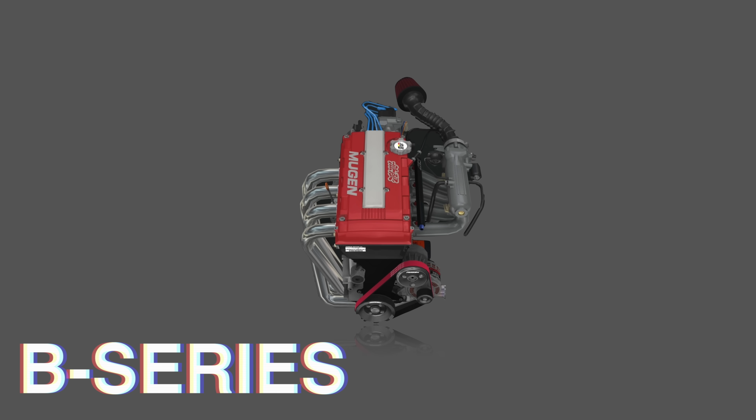The Honda K Series. One of the best bang for your buck inline 4-cylinder engines probably ever, and for good reason. The Honda K Series brings together two main features of earlier Honda engines: the high revving nature of the B Series, B16 and B18 engines that gave Honda such a legendary reputation, but also larger displacement and more torquey power bands, similar to the H Series engines like the H22 and H23.

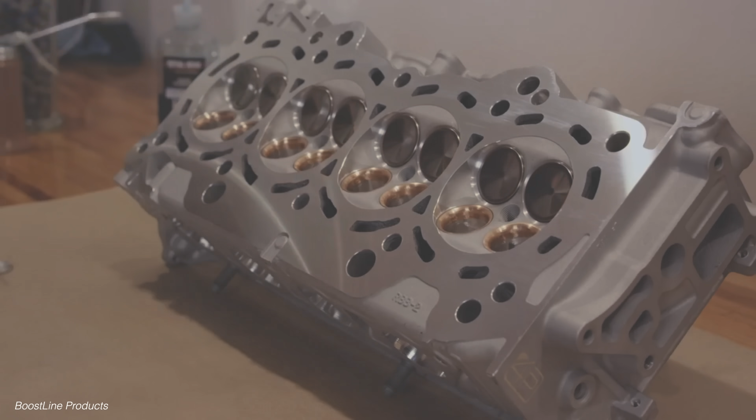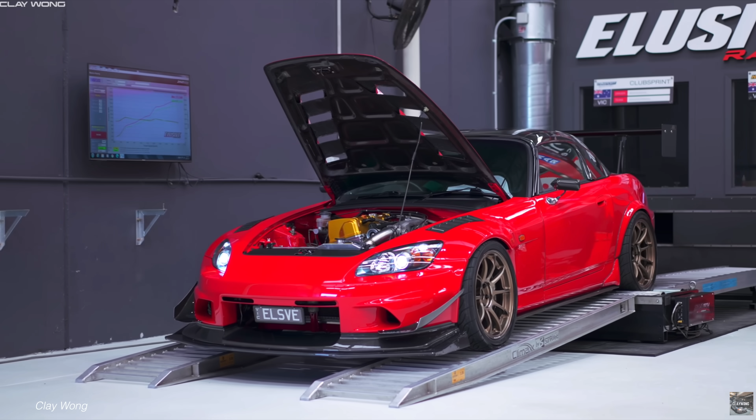What the K-Series engine accomplishes is the ability to make very good naturally aspirated and turbocharged power, wide availability and proliferation across many vehicles, and heavy aftermarket support to retrofit these engines in just about anything. Today on Explain, we will dive into what makes the K-Series so damn good.

The year 2000 saw the introduction of Honda's new K20 engine, which phased out the legendary B-Series engine.

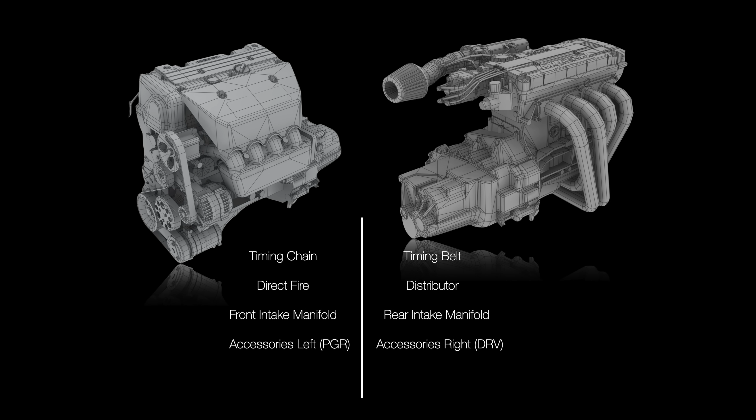K-Series engines have key differences from the B-Series: first, it has a timing chain versus a timing belt, it has direct fire ignition versus a distributor setup, it has an intake manifold in the front near the radiator support versus nearing the firewall, and the accessory drive is on the passenger side versus the driver's side. Both engines are aluminum block and aluminum cylinder heads, with not very much change in weight between the two.

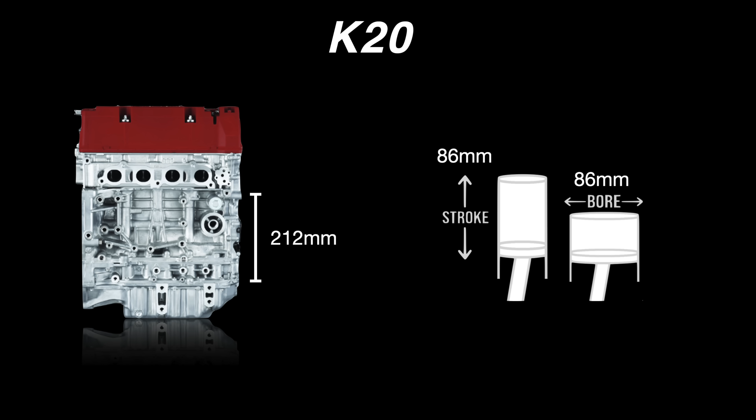The K20 has a slew of variations, but all feature an 86mm bore and 86mm stroke with a 212mm deck height, with an awesome design with the crankshaft girdle.

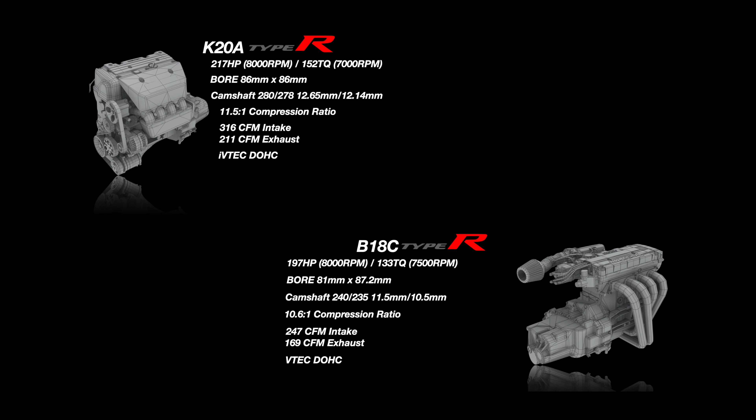When comparing the highly regarded B18C to the newly introduced K20 engine, you notice some very important details. First, it runs significantly higher compression in the cylinders, and also on a flow bench it outflows the B18C cylinder head at 316 CFM intake and 211 exhaust.

There's more duration and lift on the VTEC operation, putting that cylinder head to good use with larger 35mm intake and 30mm exhaust valves versus the B18's 33mm intake and 28mm exhaust valves. The K20 all around was just more capable, but that's almost to be expected being the Type R high performance engine, and it has a larger displacement as well.

What's more important is the power you can squeeze out of the K Series engines in the cheaper formats.

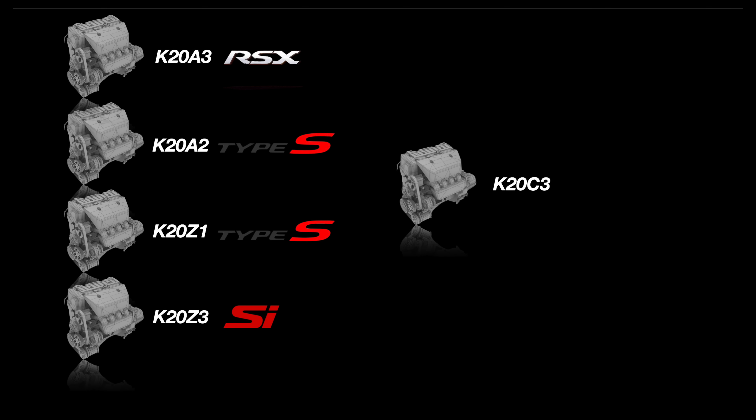The K20 holds a large premium since it was never released in the States. Here we got the K20A2, the A3, the Z1, and the Z3. All these aren't built equally, and here's the breakdown.

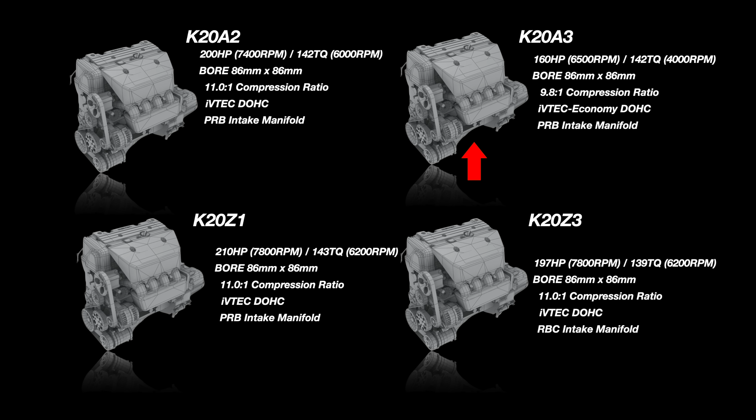First, the K20A3, found in the RSX base and EP3 SI, is regarded as the least performing K-Series of all, since it has lower compression of 9.8 to 1, doesn't have actual VTEC, only has variable cam timing for low-end torque, and redlines at a disappointing 6,800 RPM. It's a good building block to piece together, but everything you'll swap on can be found in the K20A2.

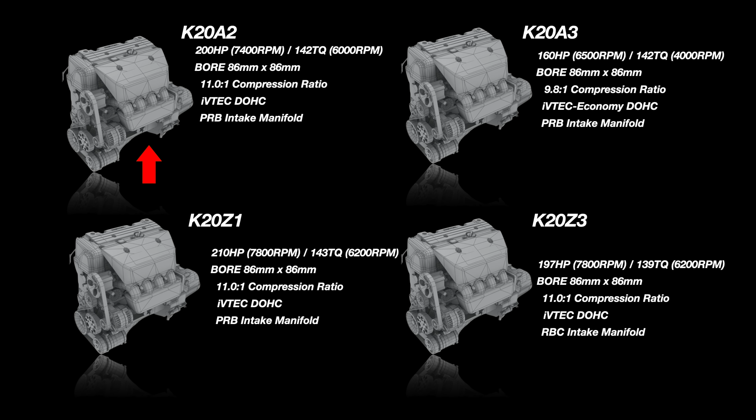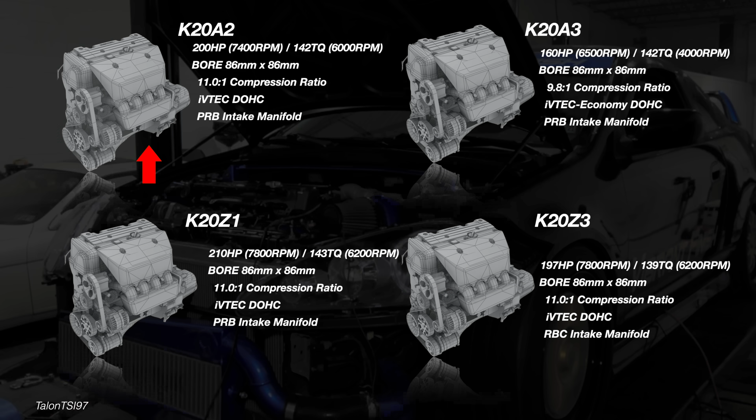The K20A2 was found in the RSX Type S from 2002 to 2004 and has a much better cylinder head flow with the iVTEC on the intake and exhaust for more lift and variable cam timing that extends to 50 degrees of range. Stronger connecting rods and higher compression of 11 to 1, giving it 200 horsepower stock, and there's plenty of examples that have been turbocharged with proper tuning, a fuel system, a clutch, to make 450 to 550 wheel horsepower fairly reliably, and since it doesn't have the balance shaft oil pump, it can push some high RPMs.

The K20 Z1, found in the later RSX Type S, has better factory camshafts for a 10 horsepower bump, but is almost identical to the A2.

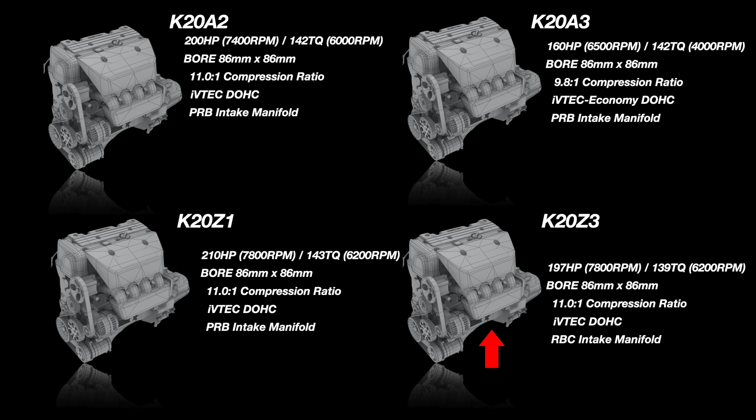The K20 Z3 is also a very good contender, as is found in the 2006 to 2011 Honda Civic Si. High flowing cylinder head just like the K20A2, but has the RBC intake manifold and throttle that is dyno proven to produce much more top end power at the expense of some low end torque. The only drawback to this one is it does have the balance shaft oil pump, which you're going to be limited to RPMs less than 8,000 typically if you want to have reliability.

Now, as solid as the K20 is, bigger is always better.

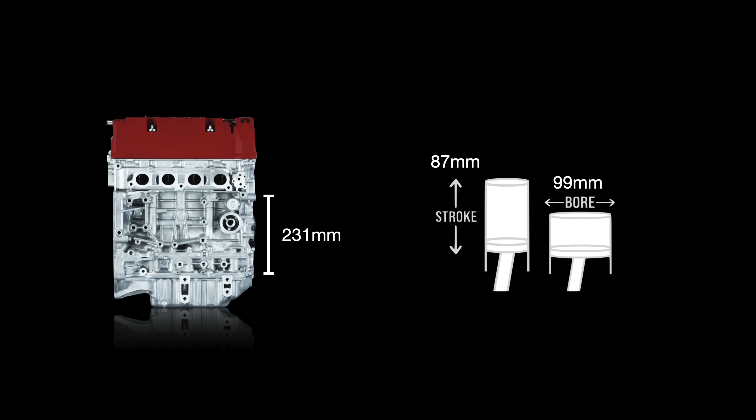The K24 is the big block Chevy of the Honda world. It has an 87mm bore and 99mm stroke, making it under square, and also has a taller deck height versus the K20 by 19mm. There's a slew of variants of the K24, but let's keep it to the bread and butter: the K24A, the A1, A2, A4, A8, and Z7.

The most common K24 you can find is the K24A4 from the 2003-2005 Honda Accord, which is shared with most of the Odyssey and Element. These are some of the cheapest K24s you can find, but with some issues. The factory head doesn't flow nearly as well as the K24A2 variant found in the TSX, and doesn't have true VTEC or piston oil squirters.

Also, if you plan on swapping to a high-flowing K20A2 or Z1 head, the K24A4 pistons don't have the proper piston-to-valve clearance, forcing you to swap pistons and rods to either factory TSX or aftermarket pistons and rods.

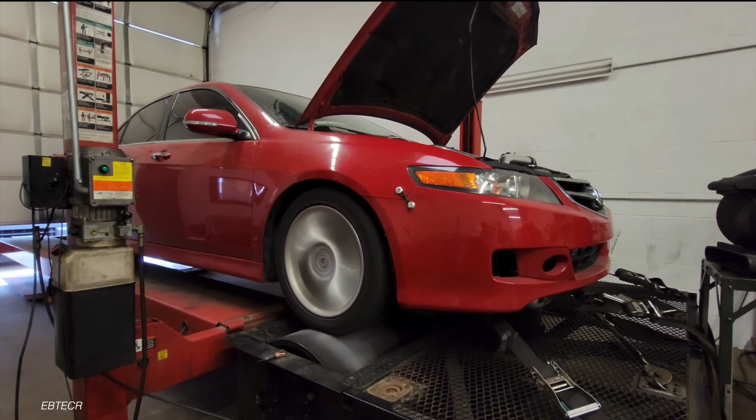The K24A2 found in the 2004 to 2008 TSX is a really good budget K-series build candidate, especially the 06 to 08, which got better factory camshafts, and they can swap the Type S K20A2 head directly on without valve clearance issues. They come with factory oil squirters, which depending on who you talk to is either a plus or a minus.

Downsides in the K24A2 is the balance shaft oil pump, which is similar to the K20s, which if you want to push high RPM, you're going to need to swap that out to the K20A2 pump. And the VTC gear is limited to 25 degrees of movement, but modifying both concerns make the K24A2 a solid choice.

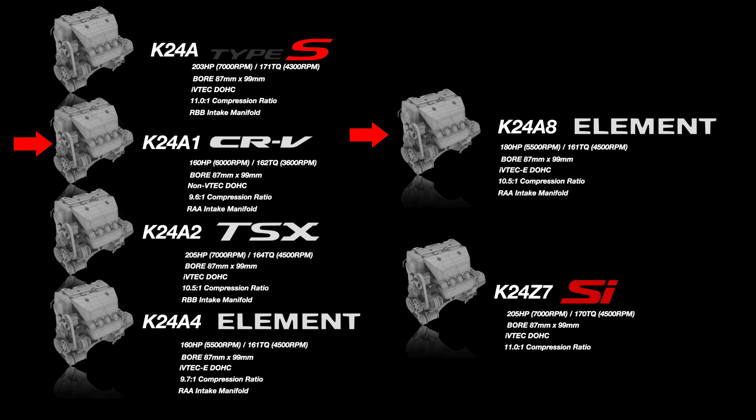The A8 and A1 are both good candidates to swap piston and rods and do the K20A2 head swap and oil pump and VTC gear and make 600 to 700 horsepower pretty damn reliably.

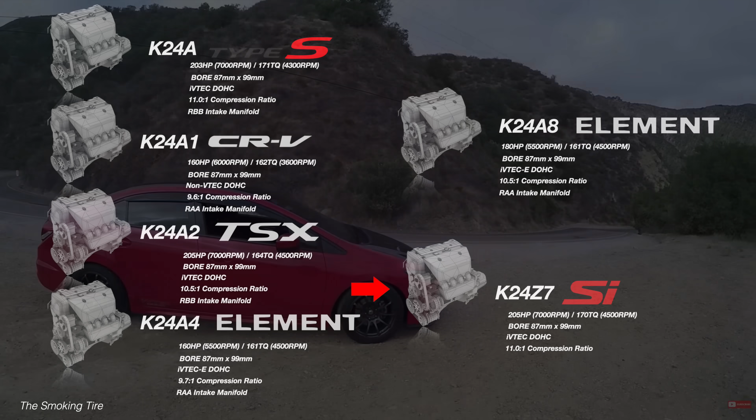The K24 Z7, specifically found in the 2012 to 2015 Civic Si, is unique because it has a cylinder head design where the exhaust manifold is integrated into the head. This helps clearance in the back of the engine, especially for swaps, but it limits the power output. It's not really the ideal engine you want for any swap, especially it should just be left inside of the Civic Si it came in.

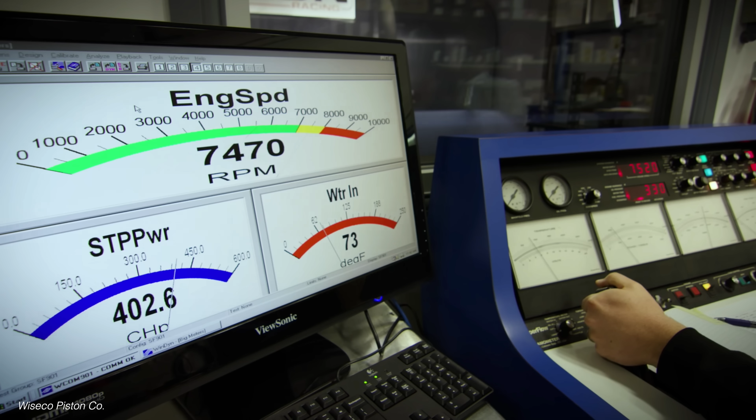Now, where K-Series engines really shine are going to be in turbo applications. Even in naturally aspirated applications, they are very, very potent, usually going over 100 horsepower per liter in very basic bolt-ons, and in race applications you can have 120, 150 horsepower per liter. In turbocharged applications, since K-Series engines are naturally very volumetrically efficient, when you strap a turbo to these things, they get absolutely ridiculous.

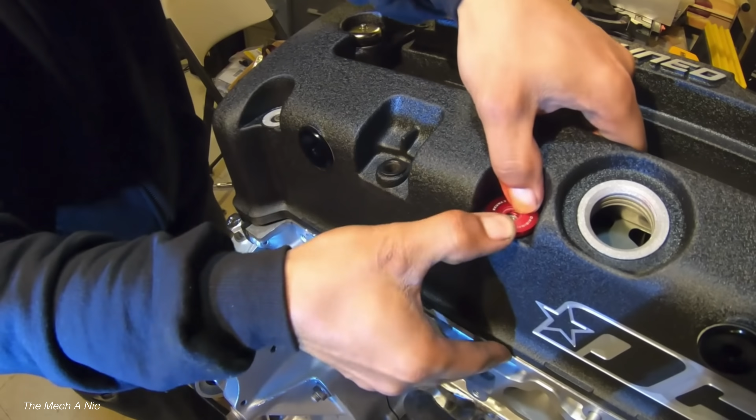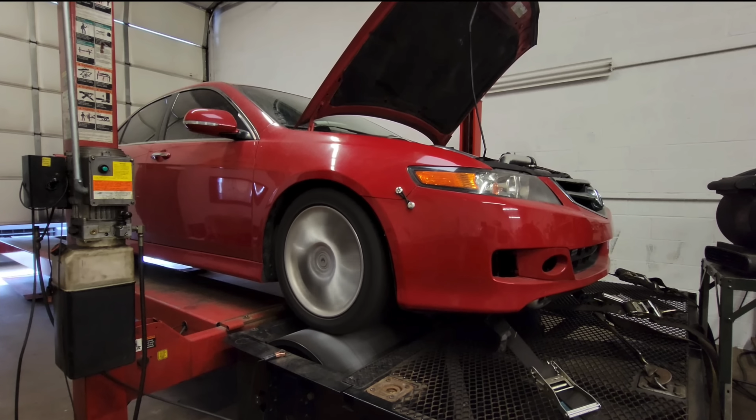Now, when it comes to reliability, the K20 and K24 are very, very stout. Remember that the cars that you pull these engines out of for swaps typically have over 100,000 miles, and then they're still prime to actually build on. Now, you also have to make sure that these have been well maintained, because sometimes because it's a Honda Accord or an older age Honda product, some people tend to not really take care of them.

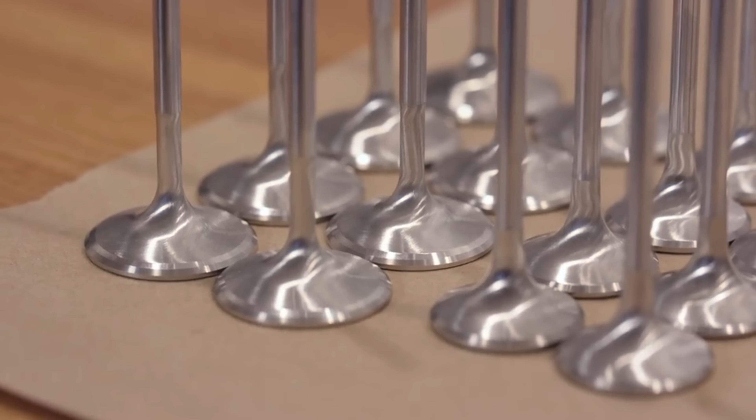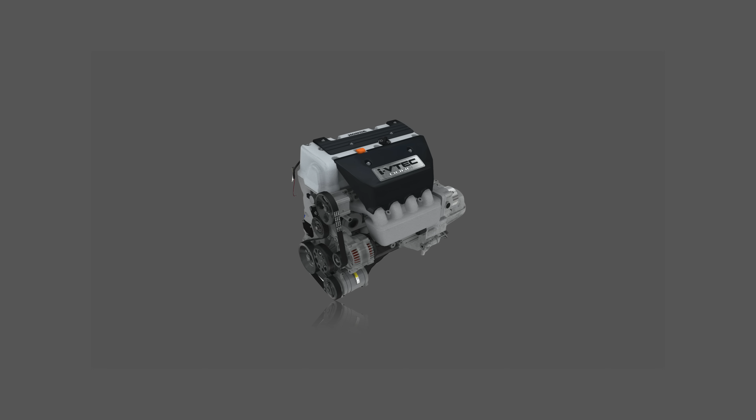And then you have the balance shaft oil pump, which if you start to hit a lot of RPM with these things without the proper valve springs, and then especially with the stock oil pumps, they really can have some nasty side effects. But other than that, I believe the K-Series is really the rebirth of the B-Series. Everything that the B-Series did good, the K-Series just carries that on, and it does it a little bit better because of technology, and you just have advancements in general.

So overall, the K-Series is absolutely goated. The K-Series will always be the go-to four-banger for any type of swapping, especially for Hondas.